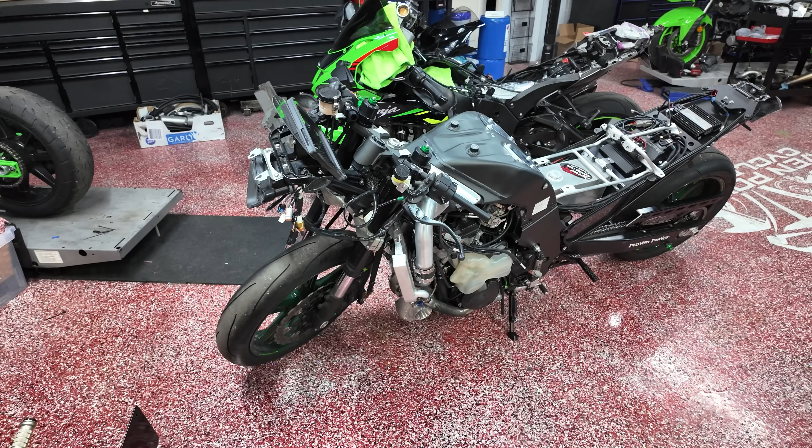This was something a little new to us, and at the time the availability of parts for it wasn't really there. So what I'm going to do right now is go over what we have done so far, some of the changes we've made with this bike.

We're going to get it on the dyno and do some initial dyno tuning here. We did miss some of the dyno tuning session—as you guys have seen, we had some startup videos—but we did get some of those issues resolved since that initial startup.

Originally we had this bike wired in—to speed up the timeline—the engine was originally built by SRW, and since then we've removed some things out of that engine and rebuilt part of it, because some of the components in there we realized we were having issues with. We heard a tapping, knocking sound. Come to find out, the timing chain was a little off, and we found a couple minor issues with the engine, so we disassembled it a bit instead of shipping it back out.

We were in touch with Scott at SRW. He's aware of some of the issues we found, but it wasn't like Scott screwed this up—it was just that the timing chain got kinked up, which is a very common issue on these. So we had to swap the timing chain out, and there were a few other little things we found and fixed, put it all back together, put it back in the frame, and got the turbo kit back on.

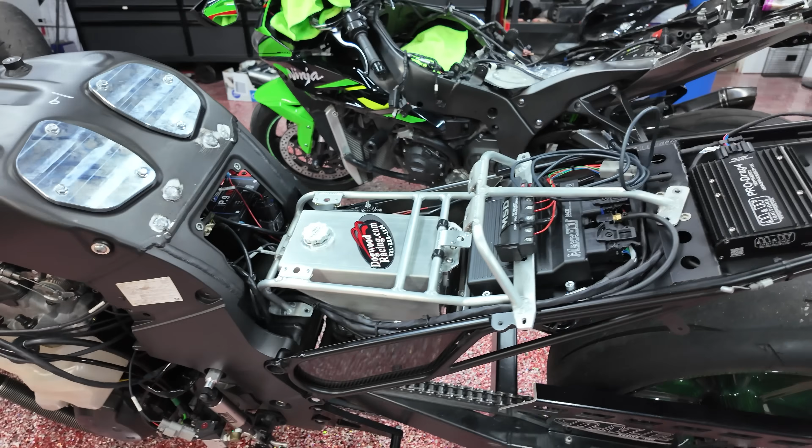Then we ended up having a misfiring issue with the bike as well. As we were diagnosing this, come to find out this bike was not originally wired for an M&W igniter. This igniter supplies a ton of power to the coils, to the ignition coils.

What we normally run is a little Bosch igniter—it's very small, normally for a gasoline-based application. What we're doing right now is running this on methanol, and there's not a lot of 14Rs out there running turbocharged methanol setups. Based on our fueling system, injectors, and turbo right now, we're expected to make around 400 to 450 wheel horsepower with this bike, until we upgrade the turbo system—that's going to be the next thing.

This was an old turbo kit that the customer brought to us that we kind of modified. We put Kirk over at Boost Lab on it, and we ended up swapping the turbocharger out.

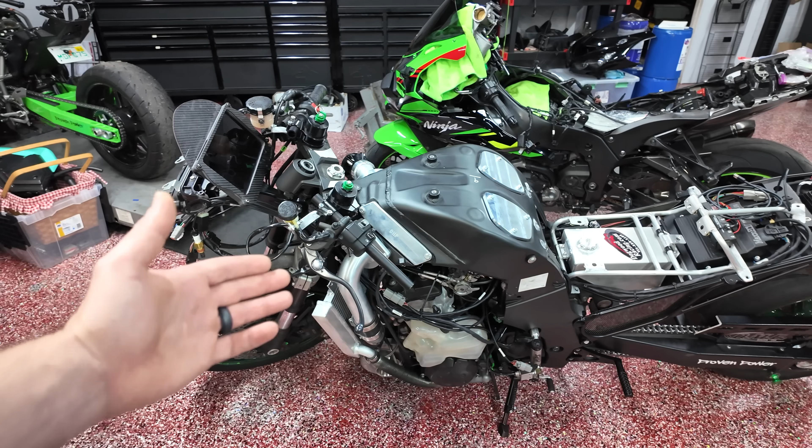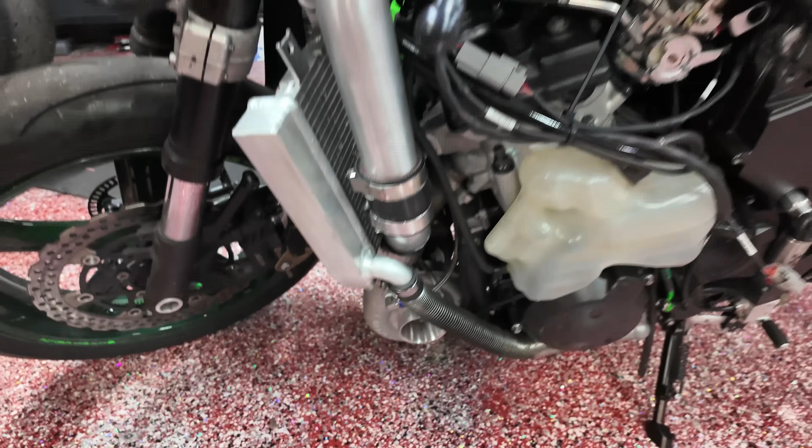We put a larger turbo with the same framing so that we could still utilize the manifold, the exhaust, all of those other things. So we basically upgraded the guts inside the turbo. Think about boring out the cylinders on your block, it's kind of like what we did. I don't remember the specs we got for the turbo, but I can tell you it's bigger than what we had. I just don't remember off the top of my head.

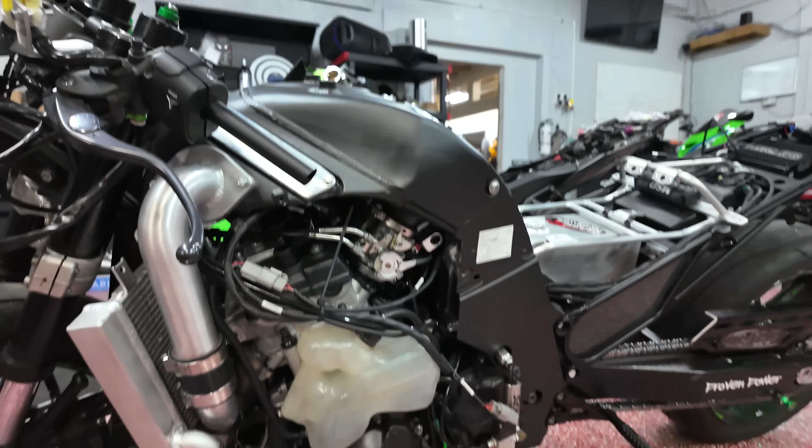That's something I can supply to you guys later on, the turbo specs. Again, I'm just not sure, but ultimately this is kind of like a stage 1 or a stage 2 kit that you would get from like RCC. Let's put it that way.

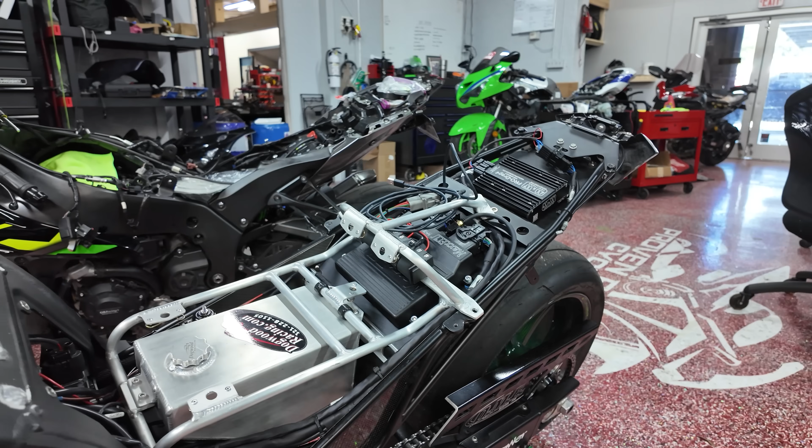He's going to be limited to about 400 to 450 because of the turbo, and that's honestly, he's got the fueling system right now, and we're gonna see what this thing produces on the dyno once we get it on there. But it should make some good numbers.

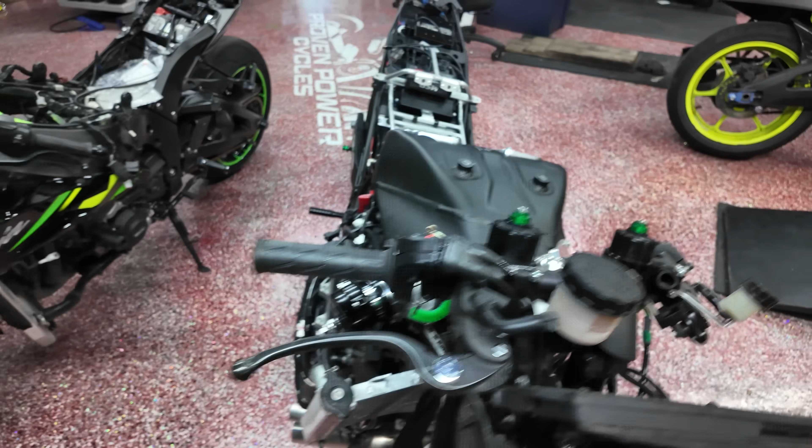Right now, what we're gonna do initially is run it on the gate, and I believe we have an 11-pound spring in there, something like that, 10 or 11 pounds. So we're gonna run off the gate pressure, which for those of you watching, if you're curious as to what that means: we have a wastegate, and in that wastegate you have a spring. There's a spring in there that has a resistance, and that resistance allows that wastegate to open and close accordingly.

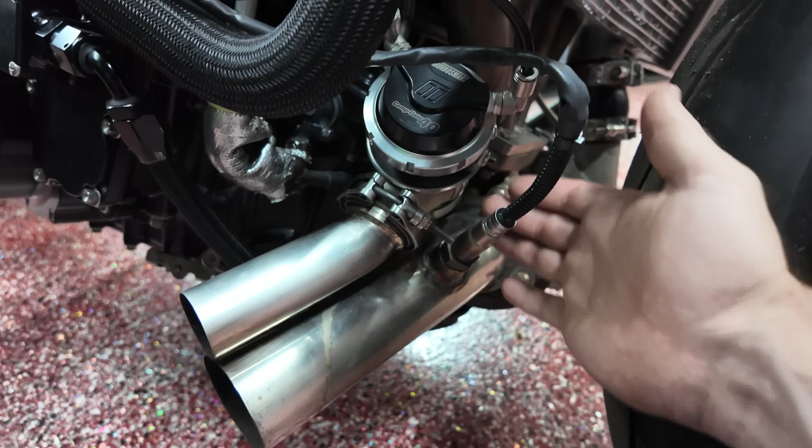So the spring pressure that we have in there, when I say it's a 10-pound spring or an 11-pound spring, what that means is at 11 PSI of boost, of positive pressure, that spring opens up in this manifold, or in this wastegate. So let me show you guys.

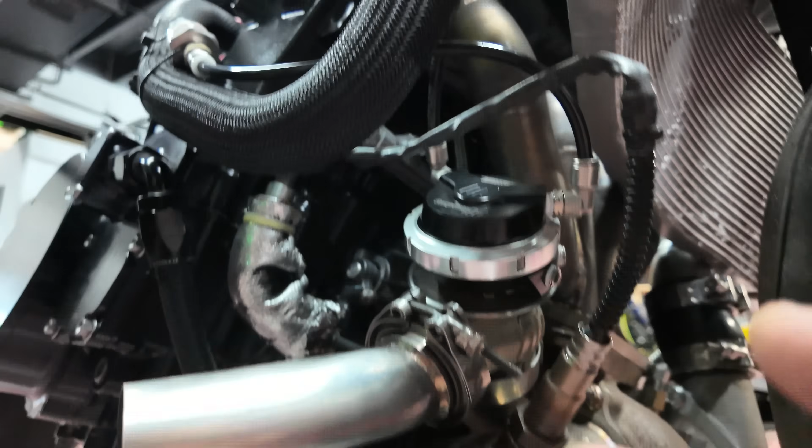There's a spring, and basically that piston opens up vertically. When that piston goes up, that means that spring cannot hold the exhaust gas anymore, so the exhaust gas is gonna push that piston up and come out here and dump out of the dump tube. So that dump tube is gonna relieve excess pressure that would otherwise spool that turbo up and create more boost.

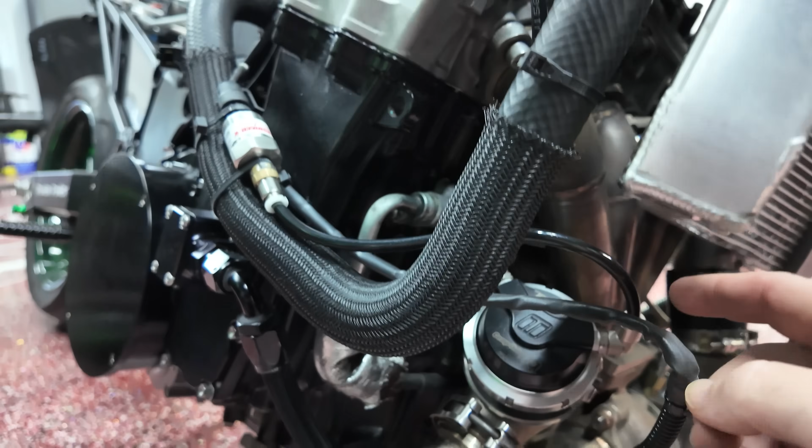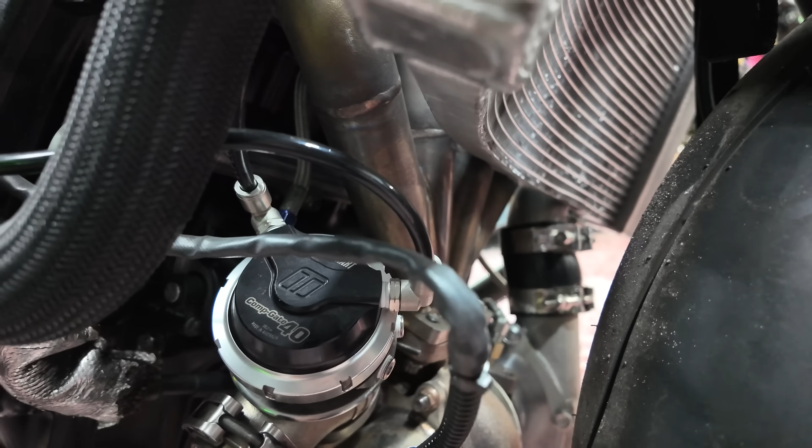And now what we have on here is we actually have a boost controller. So this is for our boost controller, this is our reference line, our reference sensor. So what this is doing, this MAC valve, we have this one hooked up to a MAC valve. Some of our race bikes are actually on a CO2 bottle.

But what that MAC valve will do is, that's our boost controller, and that boost controller is going to add excess pressure to this spring. So you're gonna get more pressure on the spring. That's gonna turn that 11-pound spring, or 10-pound spring, into, let's say, a 20 or 22-pound spring, more or less, depending on how you ramp it in and how you open and close it and all that. So that's more or less how that works.

Like I said, our goal is to try and pull up as much power as we can on this bike, but also do it in a progressive manner. So with these land speed bikes, what you guys have to take note of, and this is something that we're learning, is we don't know exactly how this is gonna work yet on the land speed bikes, but what we're being told, especially like the Bonneville bikes and these shift sector bikes, is that traction is a major concern out there.

So it's not exactly how much power can you make and then send it, it's about making that power come in efficiently to where the bike's not gonna spin out, do a backflip, all those things, right? So mainly spinning out, that's the biggest thing. It's not like you're at the drag strip where you're on the two-step and launching this bike, it ain't like that. They're more of a controlled, softer leave from the line, and then they progressively get faster down the strip.

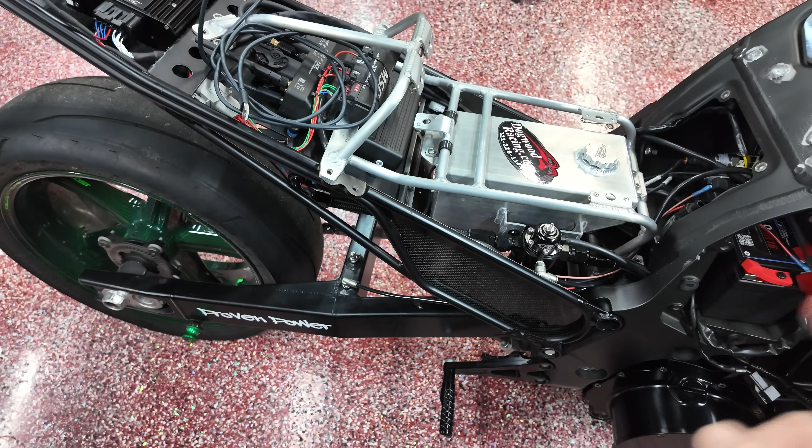Another thing I want to point out, he's been great to work with, is we have an AGM subframe here from Anthony, Anthony Gray. He's been great.

We are running AGM carbon fiber fairings all around. I know you can't see it yet, but we have a 3/4 upper that we're going to put on, all carbon fiber. We have the carbon fiber tank shell, the carbon fiber side panels that are going to go on. Everything is carbon fiber on this bike. It's going to be absolutely stupid light.

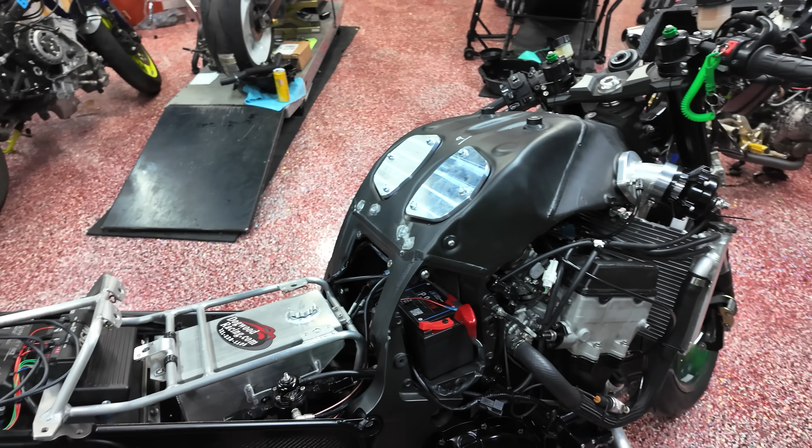We'll weigh the bike once we get everything on it. It'll be interesting to see what this thing weighs, but we're shooting for low 400s, maybe around 420, though it's got a radiator and everything, so I'd say we're going to shoot for maybe 440 to 450 range. If we can hit that range with everything on, that's pretty damn good all in all.

There's still some minor things we need to do. I need to cut the forks, we're gonna drop the bike down another couple inches, so we need to cut the forks. We need to swap out, let's see, he needs a brake line, and there's a couple of other minor things we still need to do.

But once we get it all knocked out, this bike will be ready to roll, and we got a couple of cool little surprises we're gonna do to the bike before we send it on its way. But all in all, super excited about this bike, super stoked, and I can't wait to get this thing on the dyno. So that's what we're gonna do next. We're gonna get this thing loaded up and start making some noise.

All right guys, so we got the Land Speed ZX14R on the dyno. Got it back from Frank over at Splice Racing. We don't have everything done yet, but we do have it to where the bike fires up and runs, and there's no more misfiring.

Boom. So that was the biggie, oh man, it's on meth. That was the biggie we really wanted to do, I gotta walk away from that. That's kind of the biggie we really wanted to see, was we wanted to get it fired up right away. We wanted it to fire, rev, do all the things immediately.

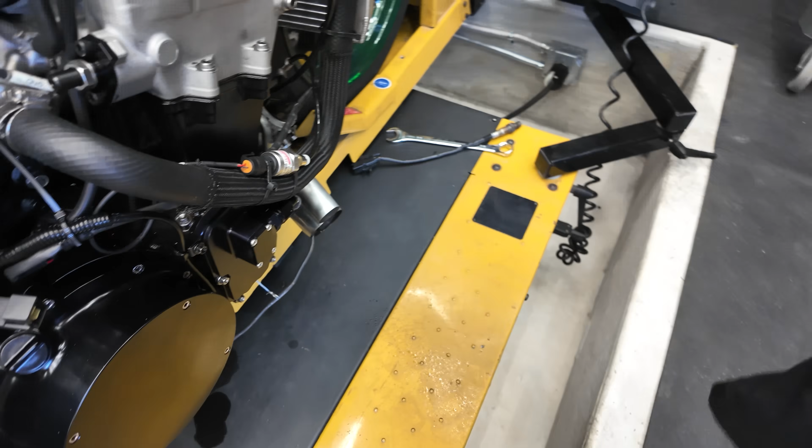All right guys, so I just wanted to show you cold start really quickly. Give me a second, let me get everything kind of reset up here, and we're gonna do another pass. I made a ton of changes to the fuel mapping and the way the calibration was all set up. I'm getting ready to go test them, so let's see what kind of power we can make. Honestly, I'm just looking at air fuel, well, lambda. I'm making sure that all of the lambda looks good and nice and clean, so just kind of doing some partial throttle right now, and we're gonna see how it does.

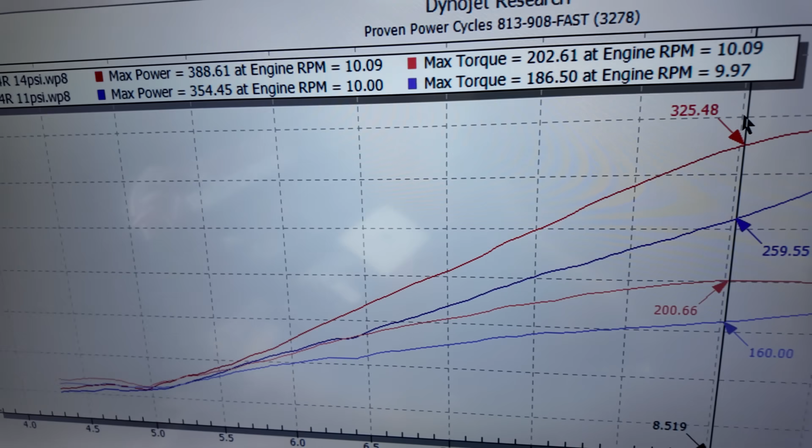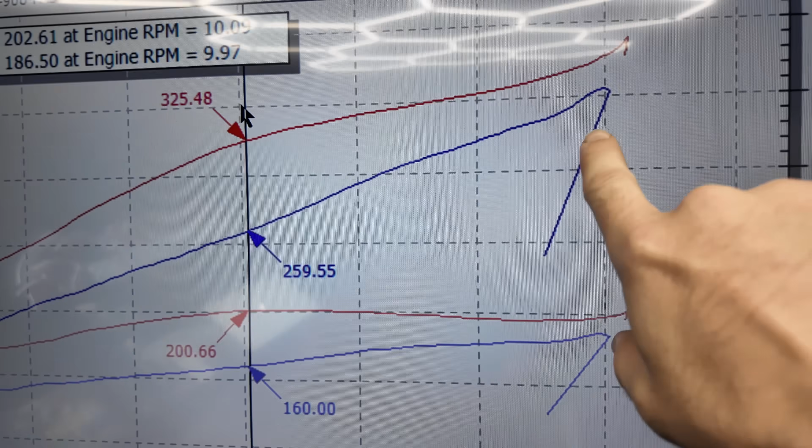If you see here at 11 PSI of boost, so 11 pounds of boost, we're at 354 wheel horsepower and 186 pound-foot of torque, okay? Pretty dang good. And this is what I wanted to show you guys. So it's coming in nice and linear all in all, but you see right here how we have this kind of extreme slope up right there, right around 10,000 RPM.

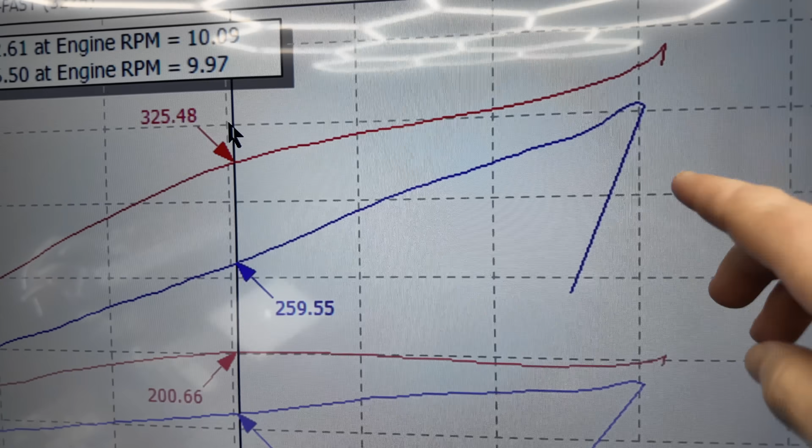Right there, that's wheel spin. That's the wheel spinning, the tire spinning on the dyno, then it grabs really quickly. So we're ending it there because obviously as it's spinning, you don't want to bounce off that rev limiter, as a good friend of mine, Johnny Turbo, is telling me.

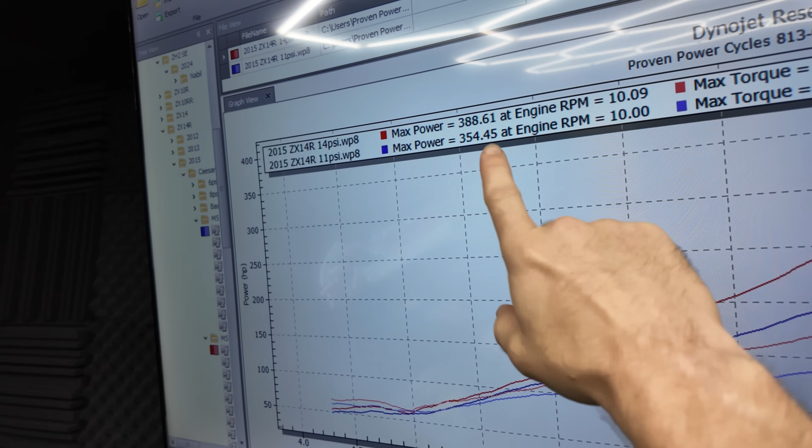You want to stay away from that limiter, okay? So now at 14 PSI of boost, we made 388 wheel with 202 pound-foot of torque, okay? Now look how it ramps in totally different, okay? From the get-go, it's coming in a lot harder, all right? Now, if you can see here, this is at 8,500 roughly. We made 259, we were making 259 at 11 pounds of boost.

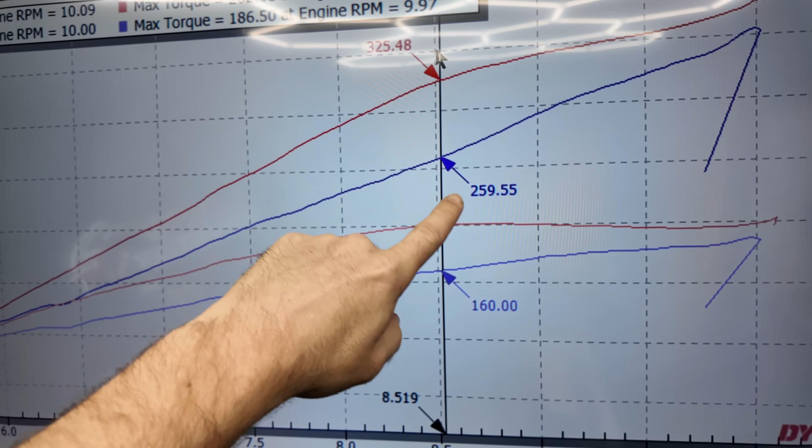Now we're making 325. Part of that is getting the tire to kind of hook, as you can see, it starts to spin again right here, and then it grabs again at that higher RPM. So again, that's telling me that we're making a lot more power than what we're actually displaying here. We just can't get the tire to actually grab on the dyno.

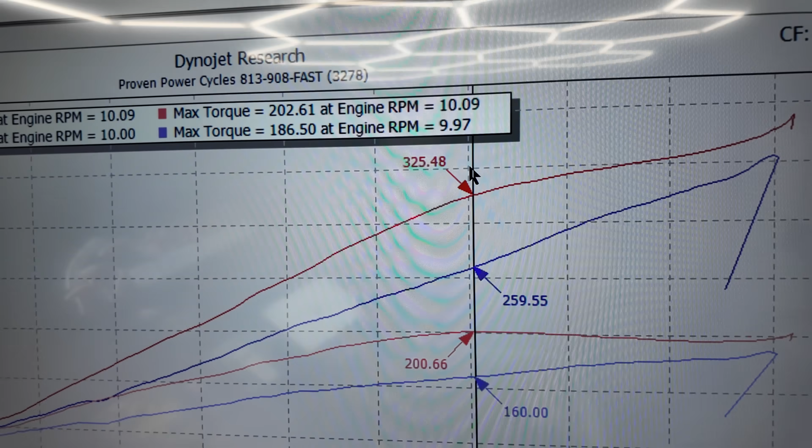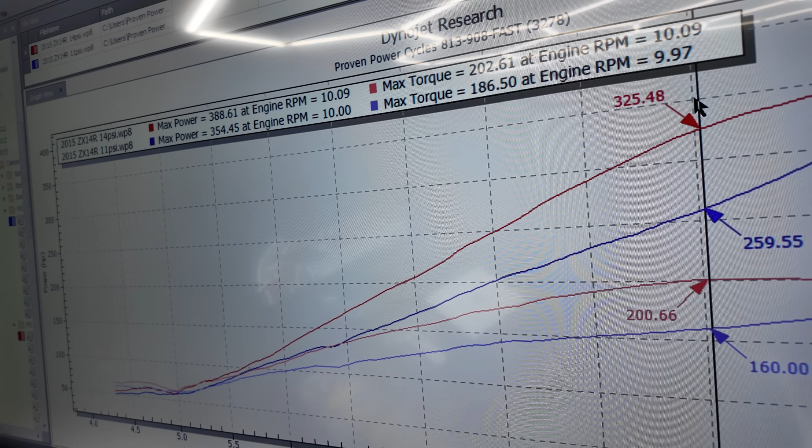So massive, massive, massive gains. I mean, that's a 66 wheel horsepower gain right there, just from a 3 PSI difference in boost. So this bike is going to scream. Our target, ultimately, our target is around 25, 26 pounds of boost as of right now is what we're targeting for. So ultimately, this thing should be making well into the 400s.

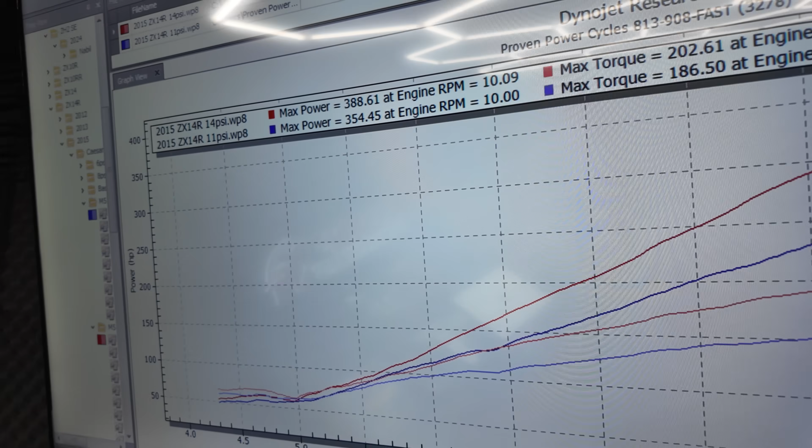If you're doing the calculation at this rate, every PSI of boost, the rule of thumb is add about another 10 wheel, roughly. And if you see here, we added 3 pounds of boost, 3 PSI, and we picked up roughly 30 wheel. So it's safe to say if we're adding another, let's just say 6, that's 60 wheel. We're going to be in the mid, like 420s or so, something like that, like 440s.

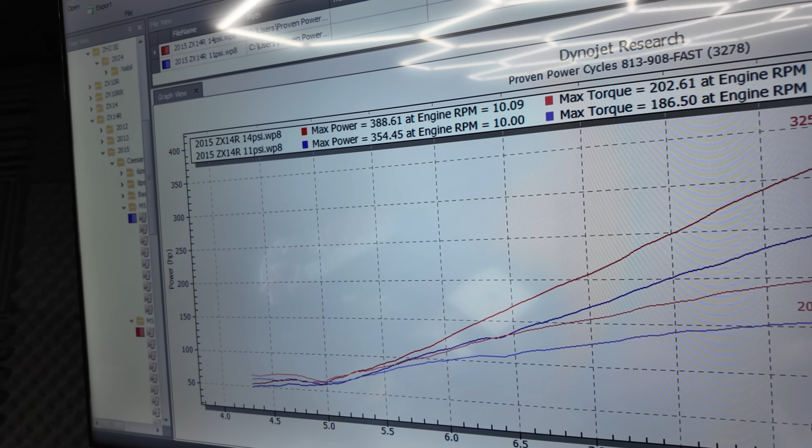So if we add another 9 PSI to that, you're talking about another 90, let's just say another 10 pounds of boost actually, you're at another 100 horsepower. That's 488. So we're kind of overshooting. We should be actually, maybe we might be even closer to the 500 wheel mark. That would be ideal considering what he's trying to go and do.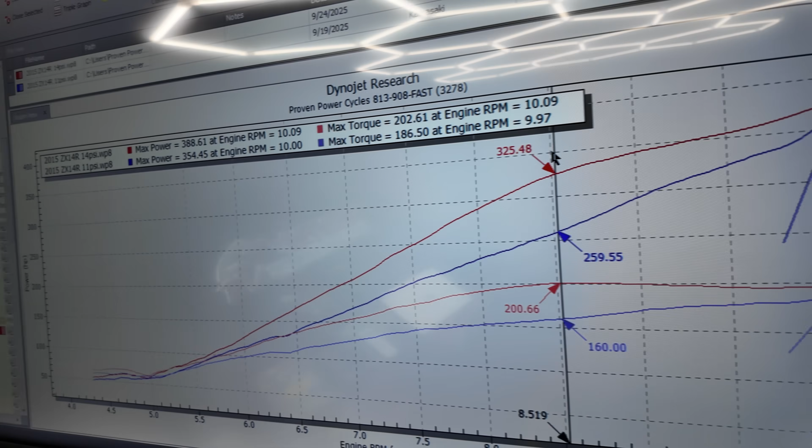But that's our goal, that is our goal, and at this rate right here, it's going to make every bit of at least 450, if not going past that 450 mark. So the math is there.

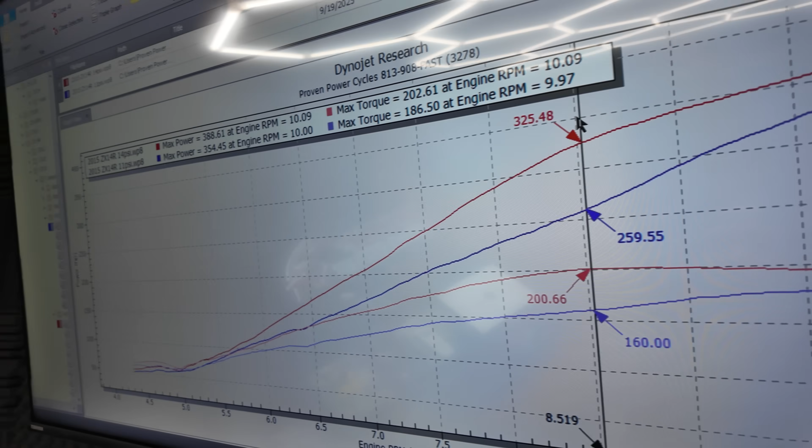The bike is absolutely screaming. It's happy. It fires right up. It's doing all the things we want it to do.

There's a lot more to do on the bike. It's not finished, but considering this is really the first time I'm messing with this MAXXECU race version, there were some learning curves. This is also the first time I'm really messing with the open loop boost controller, so there's definitely a big learning curve here, but all in all, very happy with this.

The Lambda, everything looks very good. There's some little discrepancies I'm trying to get figured out, but all in all, it's ready to run on the track. It's ready to go out there. It's ready to be taken out.

So the next thing we're gonna do, we're gonna dress this bike up. We're gonna get the carbon three-quarter upper, we're gonna put all the carbon bodywork on it. We gotta mount everything, so we gotta drill a bunch of holes and bolt everything down.

We're gonna go over our little checklist, if you will, to ensure that the bike is ready to roll, ready to be taken out, and ready to be raced.

It needs another oil change. We got methanol in the oil, which is a very common thing when you're using methanol fuel. You're gonna have to change the oil very frequently in those, to ensure the oil is fresh and not diluted.

What ends up happening is because you have to run so much volume and run it so rich, the fuel tends to seep past the rings and get mixed into the oil, which breaks down the oil. Now you've got fuel and oil going throughout your engine where it should just be oil. So frequent oil changes are a necessity to keep the engine alive, and to keep those bearings healthy by constantly changing out that oil.